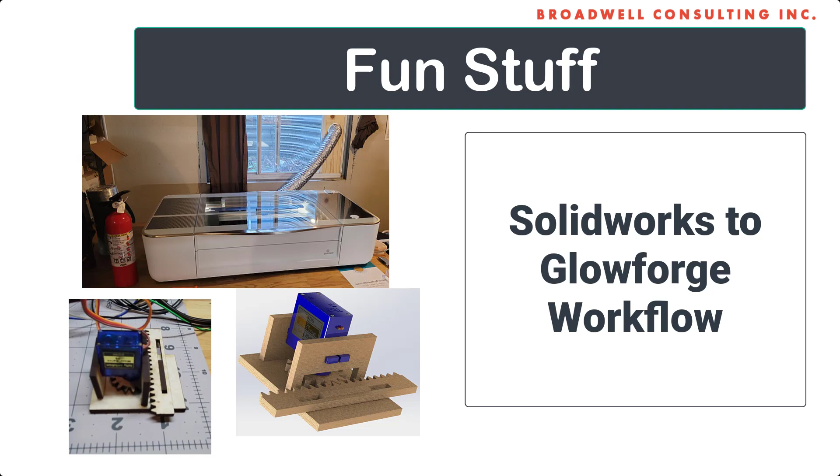Today I'm going to show you something that's a little bit different than my typical embedded systems stuff. I recently got a Glowforge personal laser cutter that I've been experimenting with for about the last 2 weeks and made some aesthetic items that turned out pretty nice, and now wanted to start doing some engineering work with it. So I thought, as a first project, let's try to create a rack and pinion.

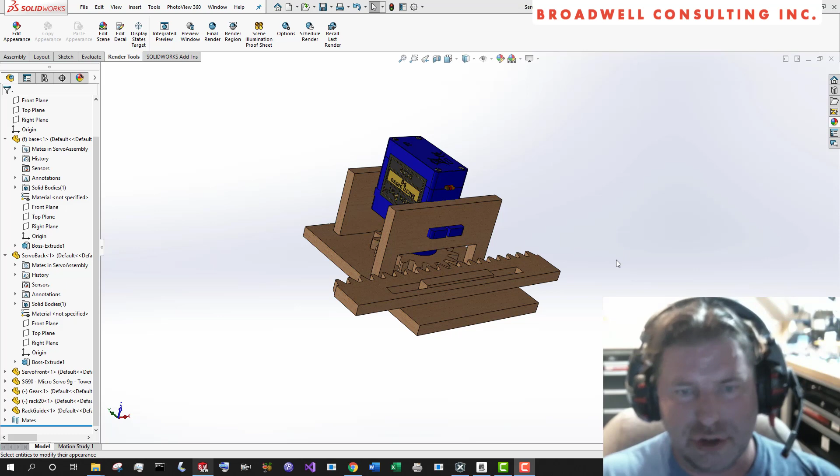And so I made one of those up real quick in SolidWorks using the power transmission toolbox, and I made sketches of 6 parts: this base, the back of the servo, the front of the servo, the pinion gear here, and the rack, and then a guide for the rack. And so I have 6 parts that have 6 sketches.

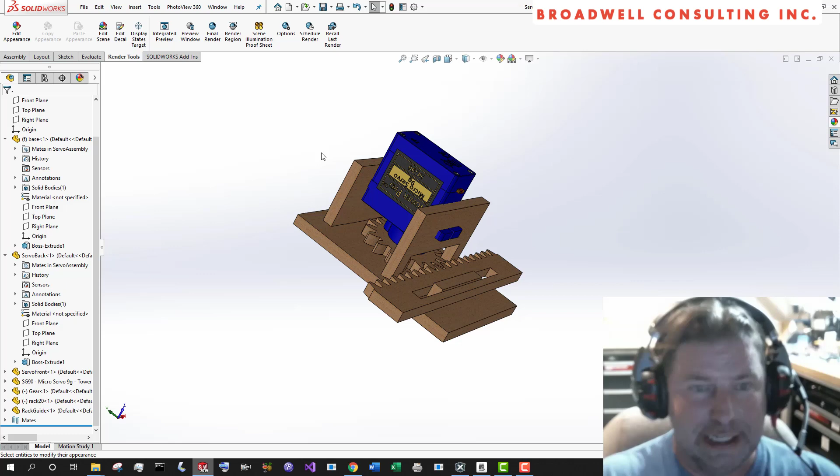They're single sketches that are simply extruded out 1/8 of an inch to simulate the draft board that I'm going to be using. Ideally you'd use something that was better and wouldn't wear. Delrin is my first thought, but I haven't ordered any yet. So since I'm just kind of going through the motions and learning things, I'm cutting everything in draft board. So we're going to see how to get these parts out of SolidWorks and into the Glowforge.

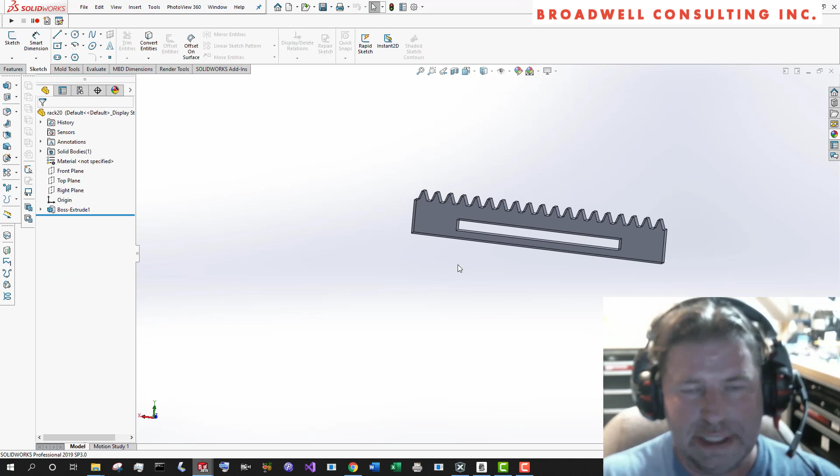So I will do one of these. It's the same for all of them. So for instance, here is the rack that we have. And it's real easy. I've got the single boss extrude from the single sketch. And we're just going to go to File, Save As. And we will go to DXF, and we will say rack20.dxf and say save.

So when we do save as, we get this DXF DWG output. Just leave it on annotation views, and I always put my sketches on the front plane when I'm doing these Glowforge parts. So just click front. That guarantees that you'll get a view that is dead on for what we need with the laser. So that looks good. We're going to say OK.

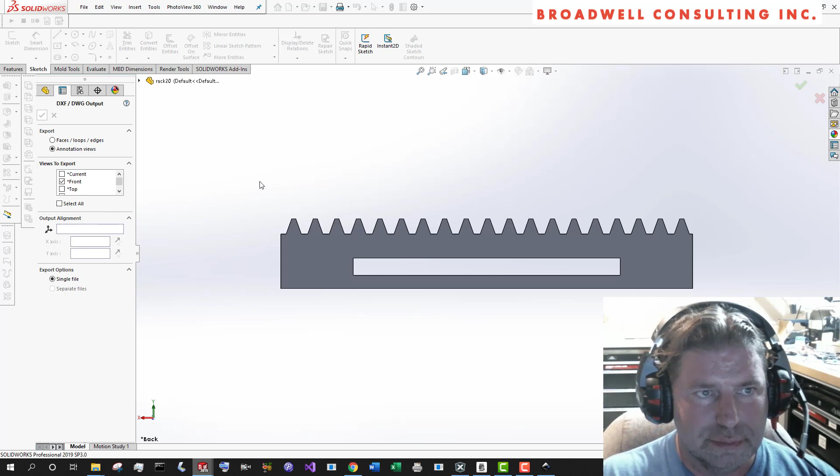It'll show you a preview of what you're going to get. If you have any construction lines, or if you had a sketch open or something that you don't expect, you can click on them and say remove entities. This looks OK. So we'll say save. And that's that. So now we're going to go to my go-to program.

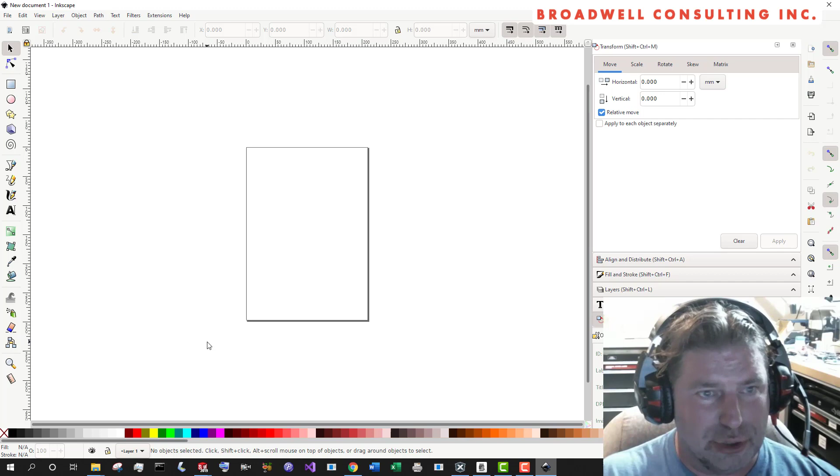We can't load the DXF files directly into the Glowforge online app. It'll throw an error. They've been promising back to 2016 that DXF support is just around the corner. So who knows when it'll get here, if ever. But we created this rack20.dxf, and I'm going to go to the file manager and just drag it on there.

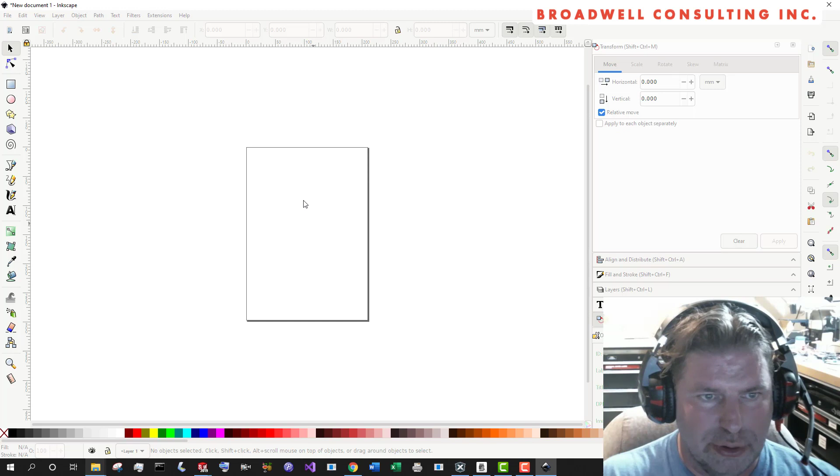And it'll say, okay, what is your method of scaling? And we want to say read from file. That will load the proper sizing off of the DXF file. And we'll just say include and say OK. And hey, there's our rack. Looks good. So now this thing is in a format that we can cut.

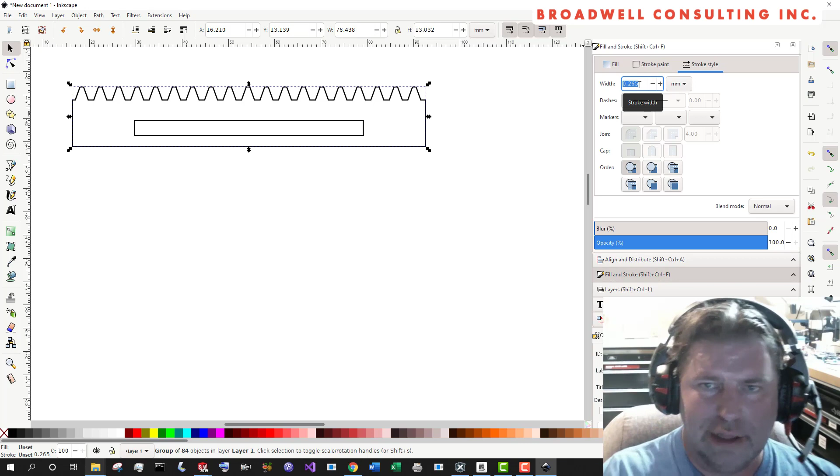However, we want to have a little bit more control over the cut. So right now we have a single cut. And let's make sure, for the stroke style, let's make this 0.01. Make it 0.1. Just make sure it's sufficiently small that the Glowforge doesn't try to do multiple cuts.

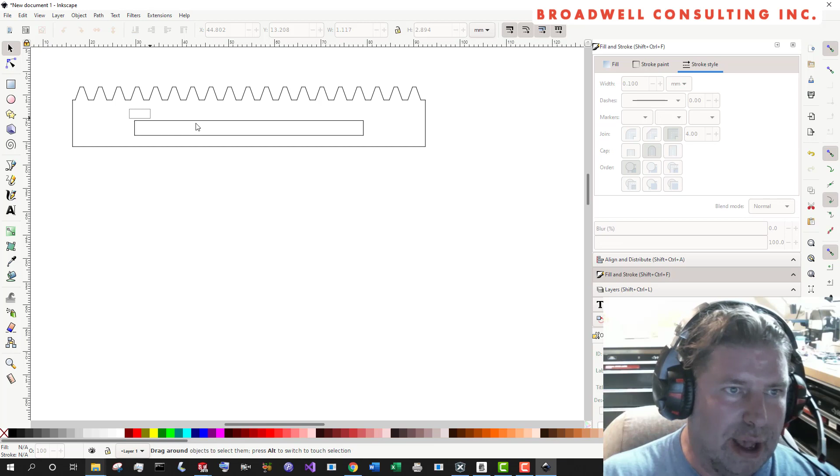And what I'm going to do is I'm going to put a box around this, and I'm going to hit Control U to ungroup it. Now I have the inside and the outside separate. So I'm going to select the inside and set it in a different color. Let's pick this gold all the way over here at the end. So you can see now that's gold.

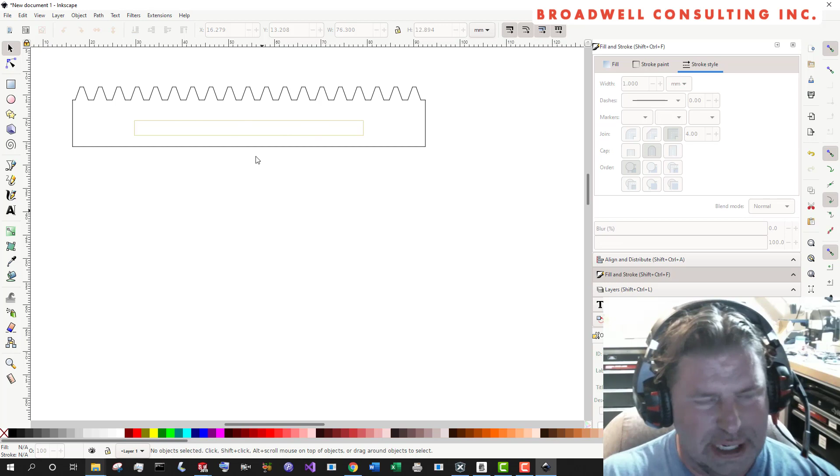I'm going to draw a line around it and regroup it. And what that does for me is it allows me to make the cuts in 2 different steps. I want to cut out the inside first, then the outside. If I don't group it that way, the Glowforge may cut out the outside, it'll fall down, and your focus length will change a little bit, and the part may move slightly before it makes this inside cut. So we want to cut inside slots first, and then the outside outline of the part.

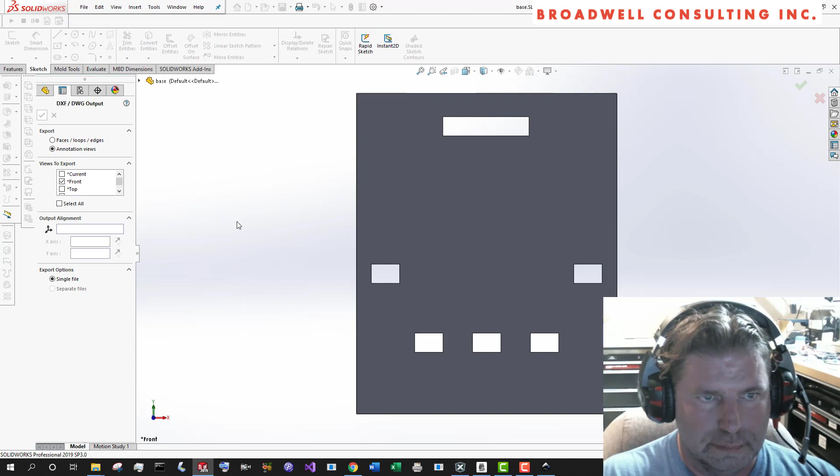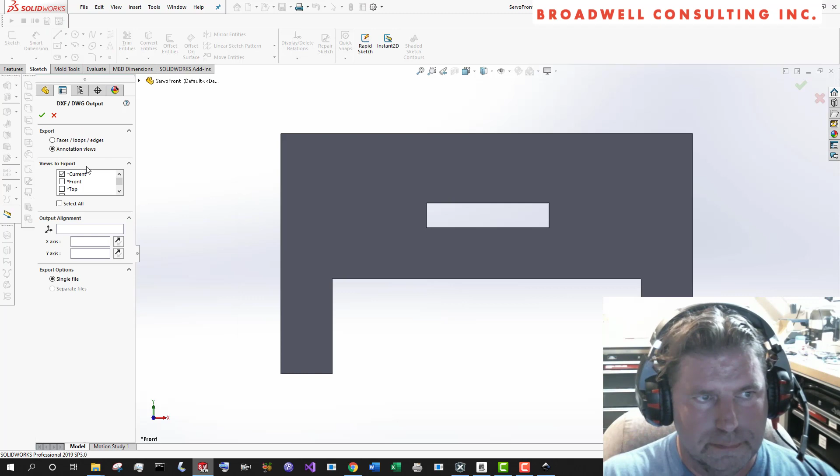So that's all you have to do. Now we will just very rapidly go through and add all of the other parts that we want to cut to this SVG. Okay, so we've got our 6 parts in here. We've taken all the inside cuts and turned them into different colors, then regrouped their individual parts, so we'll be able to drag them around together in the Glowforge app.

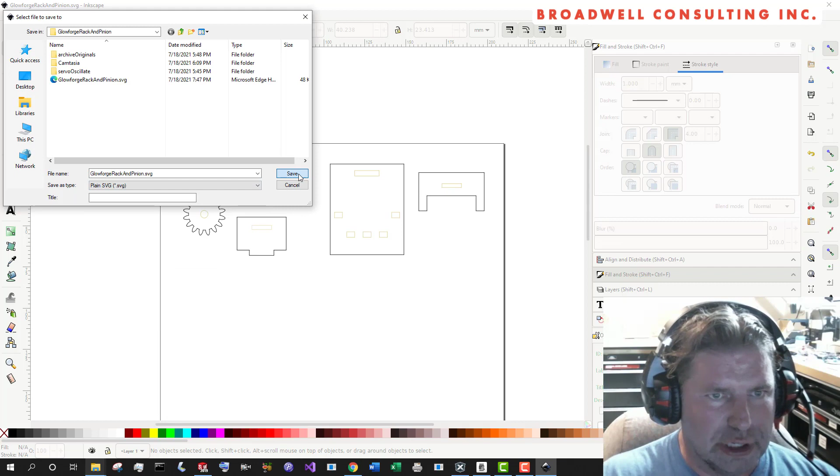And we will do a save as. Actually, I want to do a save as just so we don't have any confusions. We're not going to save it as an Inkscape SVG. We're going to save it as a plain SVG and replace. Okay, so that should be good.

Now in the Glowforge app, we're going to go to Create, Upload from File. We'll go to File, Upload, and we will upload the Glowforge rack and pinion. And it's processing. And boom, there it is. Okay. So we've got these 6 parts. We can drag them wherever we want.

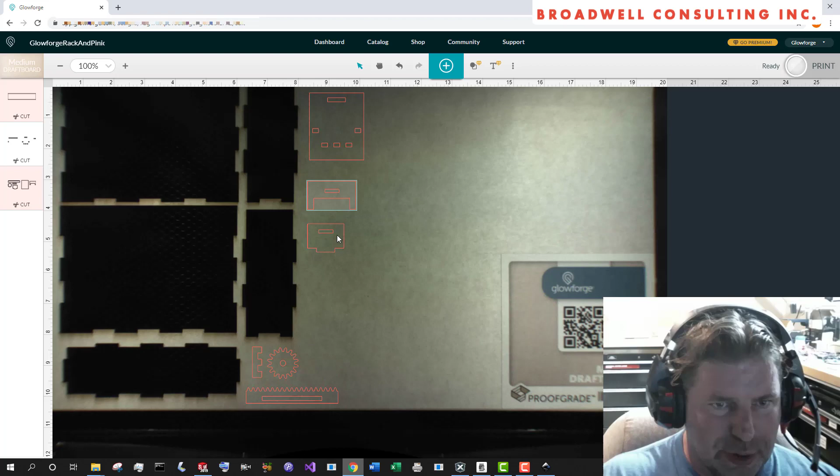Okay. Looks like a fairly good way to conserve my board space. And the important thing here, you can see it's got the outlines set to cut first. So we're going to drag the inner cuts up, and I must have accidentally used a different color for this one. I must have clicked on the wrong color because it's saying that this one part right here is going to cut out in a separate step, which is fine. The important thing is that these inner cuts come before the outer cut.

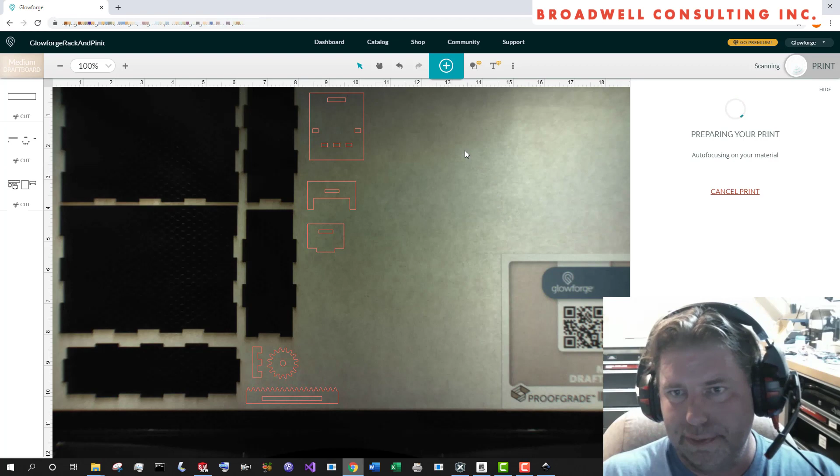So that looks good. I'm using Draftboard, it's a Glowforge Proofgrade material, so I don't have to worry about print settings. We're just going to tell it to print. It'll wait a minute. Okay, and this will be a pretty quick cut, only 1:53. So let's go ahead and walk over to the Glowforge and cut that guy up.

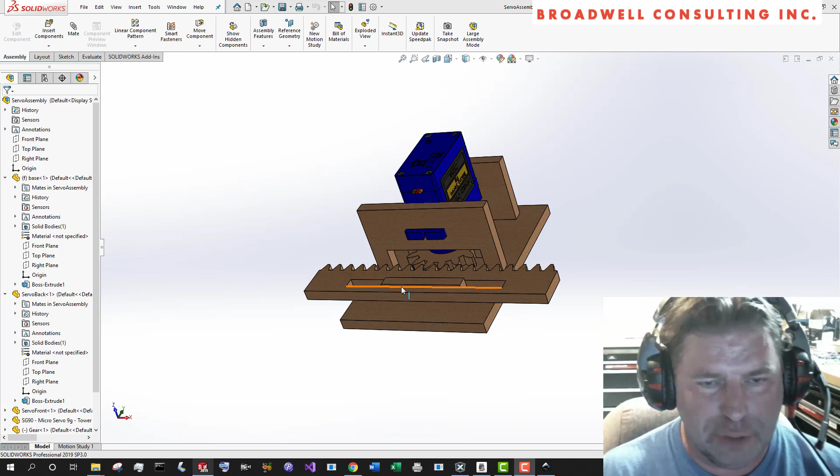So there you can see it. The dimensions all came out right. We have a functional part. Obviously, you'd add a lot more to keep the rack from jumping up and a variety of other improvements if this was a real project. But as a proof of concept to show the workflow of getting the laser cut parts from your SolidWorks sketches, I'm pretty pleased with the way this turned out.